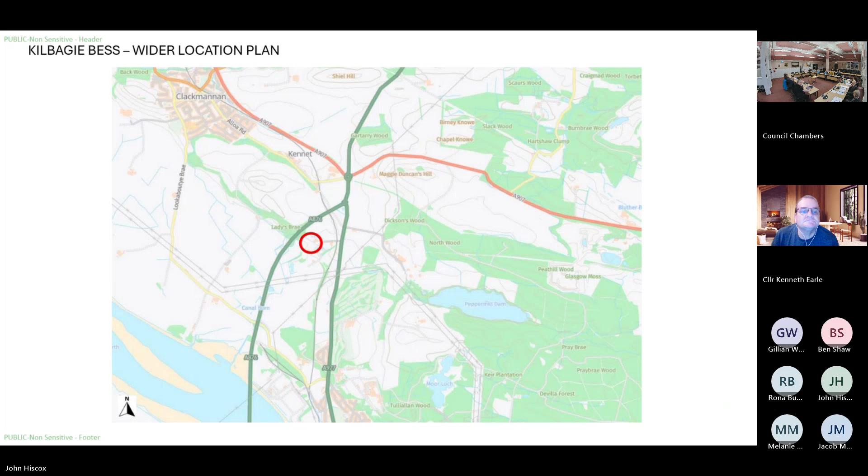Okay, so it will start to make more sense here. Site A is the primary area for development where you would see the battery energy storage systems and the substation going, and Site B over to the east there is not really being developed other than for environmental enhancement.

I think it's useful to see this slide with regard to the boundary of the county there with Fife, and hopefully you can see that quite clearly. Look at the areas that are within fully within Clackmannanshire.

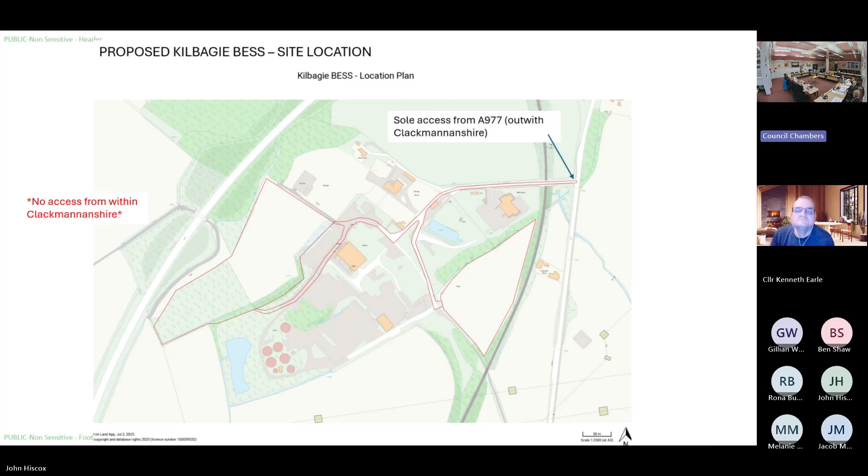I think I might have skipped - sorry, it jumped ahead. Just gone back a slide just to show you here the position of the sole access coming from Fife, not in Clackmannanshire. There's no direct access proposed for the A876.

Okay, it's caught up with itself. This is the first really informative plan we've got to look at. The main elements there, I'll try to talk you through them.

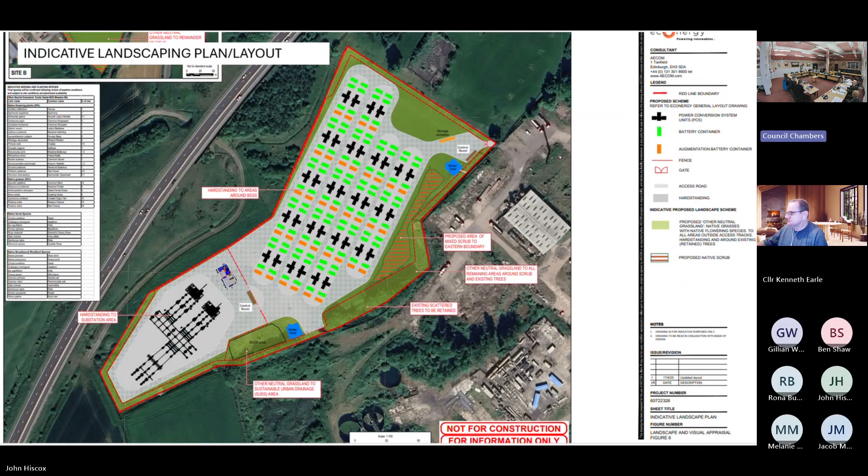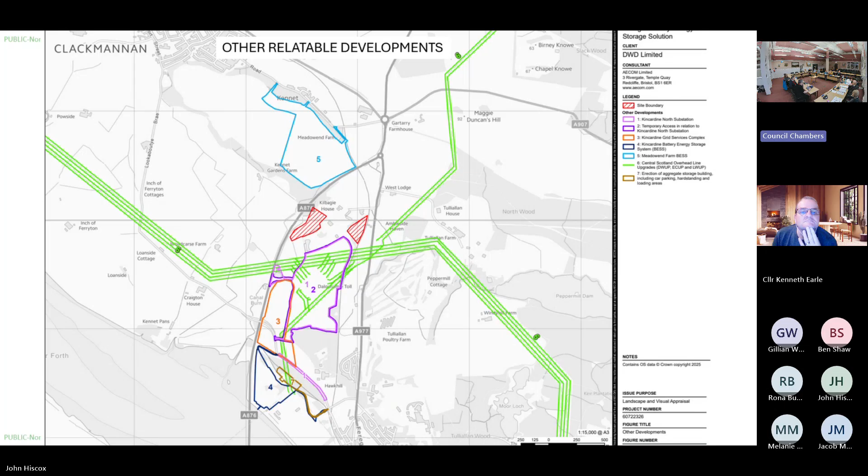A couple of years ago, we were approached with an idea for another BESS system scheme in that area. It's been through pre-application with the Energy Consents Unit, but for the past year it's been quiet, nothing's really happened. So if that is pursued at some stage, it will have its own issues, but it will be cumulative with the scheme you're looking at today, because the distance between the two is less than half a kilometre, maybe just a couple of hundred metres.

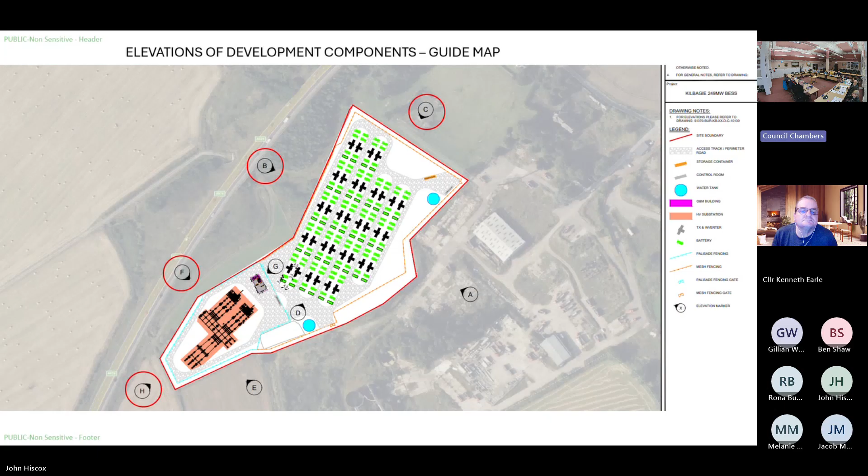So just to explain this slide, you can see the circles there with letters H, F, B and C in them, and next are some elevation drawings. It's not that easy to interpret because of the nature of the scheme, but I'll try to take you through these so you can understand a bit better what you'll be looking at. Essentially, H, F and B on the left-hand side are the sort of journey along the A876, whereas C at the top, which I've put in for additional information, is looking from private ground to the northeast of the site.

The levels across the site at the moment vary, it's not a flat site. It rises slightly from the southwest to the northeast, but there's also quite a large area of spoil, put in historically due to industrial processes nearby. That would come down, but generally the land would come up to create as flat a surface as possible. So there will be a bit of land raising, somewhere in the region of 2 to 3 metres, not a large scale, not up to the highest ground.

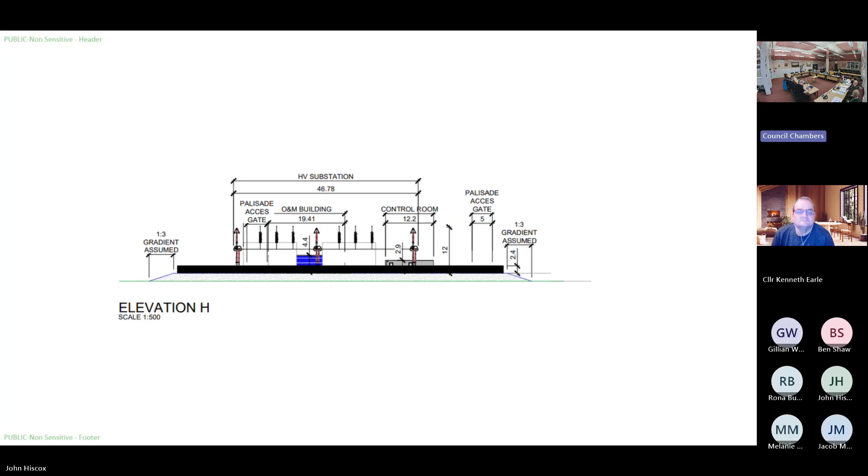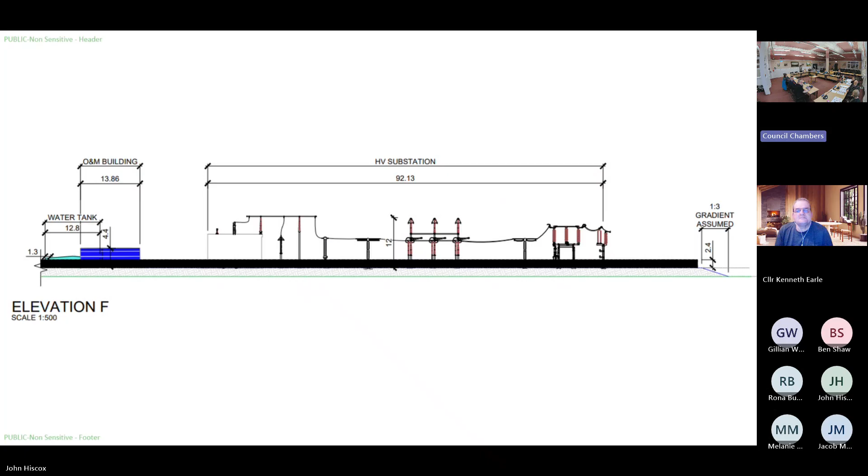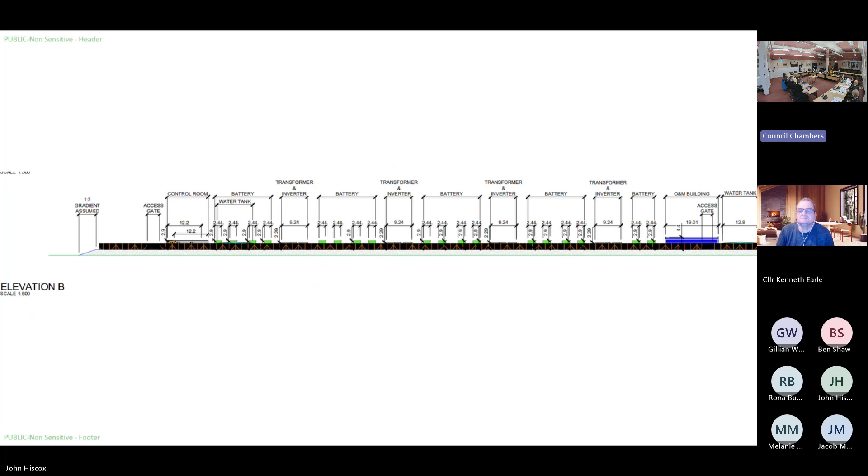The highest area is the substation area you would see first, but of course a substation, and it's important to note this when we're looking further in the presentation, it's not a block. It is see through, if you like. Some of the visualizations you'll see imply there is a sort of block area you'd be looking at, but of course it's not that in reality. I'll explain that when we come to those slides.

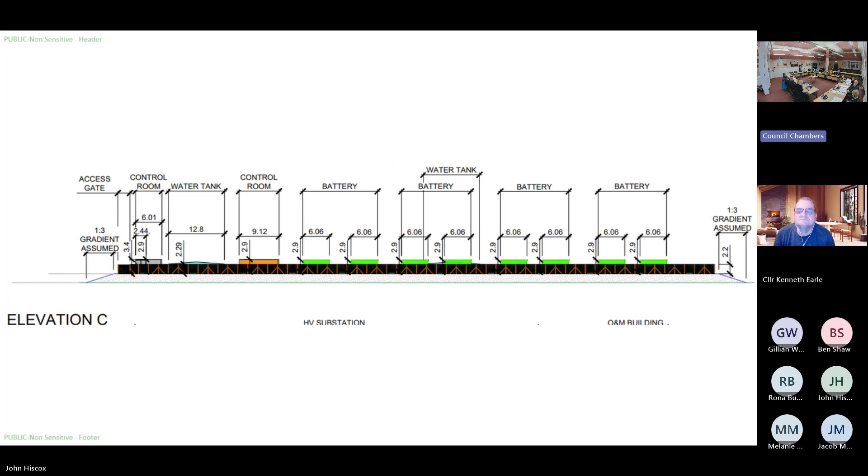And this is the last one. This would be looking southwest from that private ground I showed you, just to get an idea of the complete picture of what the thing's going to look like if it's consented. Moving on, we do have some information with regard to landscape and visual impact assessment.

And if you can just pick out in the middle of this, perhaps I could zoom that in. Would that be acceptable? Was somebody able to zoom that in for me temporarily? If not, then I was thinking more the Gillian and co. Ah, fantastic! You are a master.

So 1, 2, and 3 are in Fife. Whilst they have some relevance with regard to the overall visual impact of the scheme, I'm not including them today because really the ones we're most interested in are the ones which are going to affect Clackmannanshire, bearing in mind this is one of the main routes into the county. So 5 and 4 I will be showing you. For 6, unfortunately there isn't a decent graphic with the application to show you the potential impact. I tried finding that, but there isn't one.

I've also included 2 in the presentation. It is within Fife, but just so you can see what that area looks like - this is site B, where you'll see that the vegetation behind that site blocks off site A completely. So from the A977 in Fife, you're not seeing the development anyway. It's all screened by woodland.

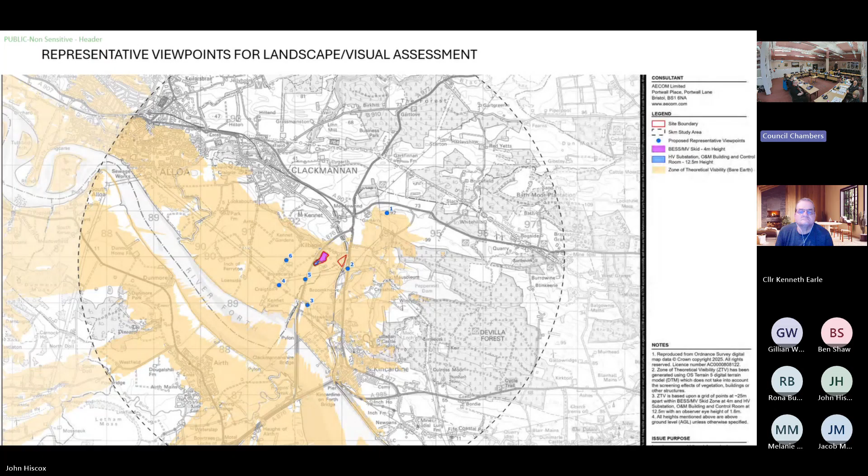Okay, would you mind zooming that out again, please? Thank you. Just back to full. Marvellous. Can you do it all the way, please? It should bounce back a little bit. Perfect. Thank you.

So this is viewpoint 4, and it is on an unclassified road, but it's more of a lane and not heavily used. But it's just to give an idea of how this scheme relates to the infrastructure already in the locality. You can see clearly there the overhead lines and pylons and so on, and also the backcloth of the landform behind and the trees.

And what I was saying earlier about the views of the substation being permeable - in this representation, the red area looks like it's a block, but it's not. That would be the upstands and the gantry, so it is very much more a permeable element of the development. The lower area, the blue, represents the level at which the BESS container units would be.

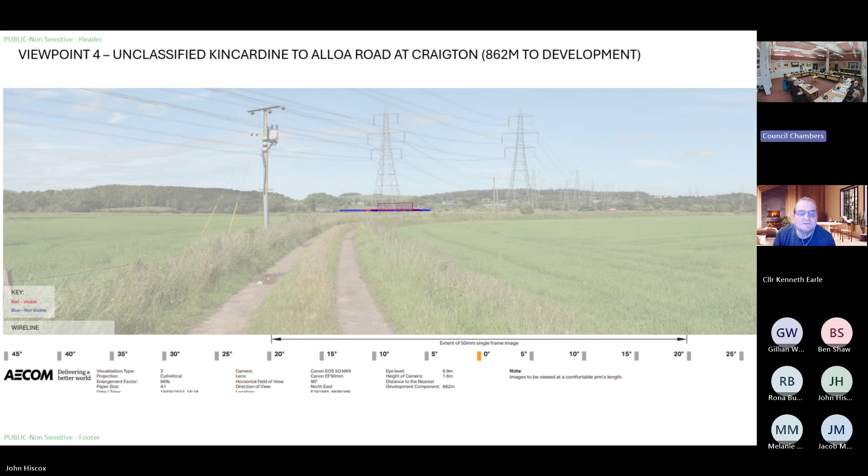So really, this is very much a secondary viewpoint, not frequented heavily by traffic. And although it's helpful, it's not as fully relevant as, for example, this one.

So one of the key considerations for us is the visual impact with regard to receptors being people using that main route into Clackmannanshire. This is about as near as you can get to it safely, which is why they've chosen it as one of the viewpoints. You can see that notwithstanding any vegetation that might be present, the area where the transformer would go comes into view quite quickly as you're coming up the A876. However, you can't fail to notice that you are already in the lee of the pylons and the overhead lines, so we're already looking at something of an industrial landscape characterized by industry.

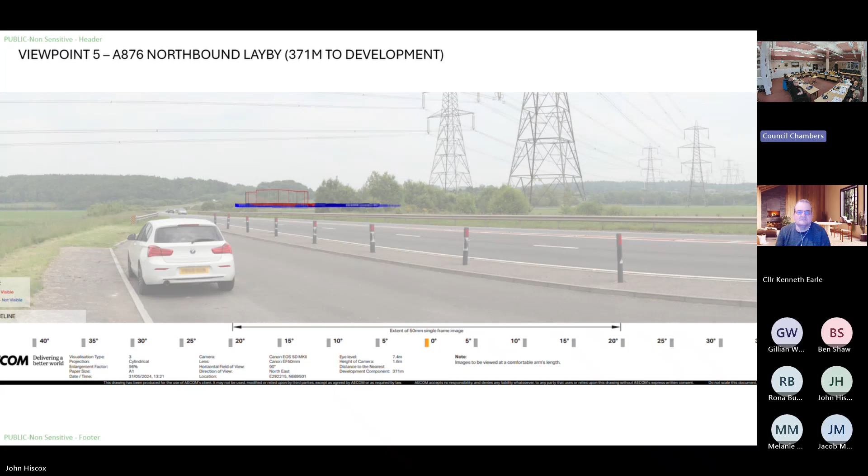So the red block there, that's not the BESS - that's the transformer area. 12.5 meters high, but permeable. But if you've seen any transformer areas in an electrical substation or any other relatable development, they have quite a significant visual impact just because of their industrial nature. So they don't disappear into the landscape, they are quite prominent. I think that's one of the things to remember about this scheme - as you're passing by, you will see this quite prominently.

This is from the A977 in Fife, and that blue area just indicates to you that you're not going to see it from that road. It's all contained behind vegetation, and that vegetation is not going to go away at any point in the near future.

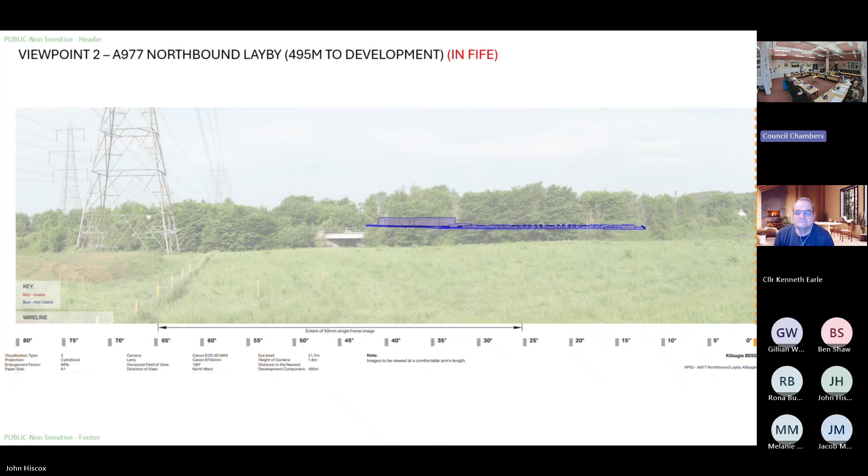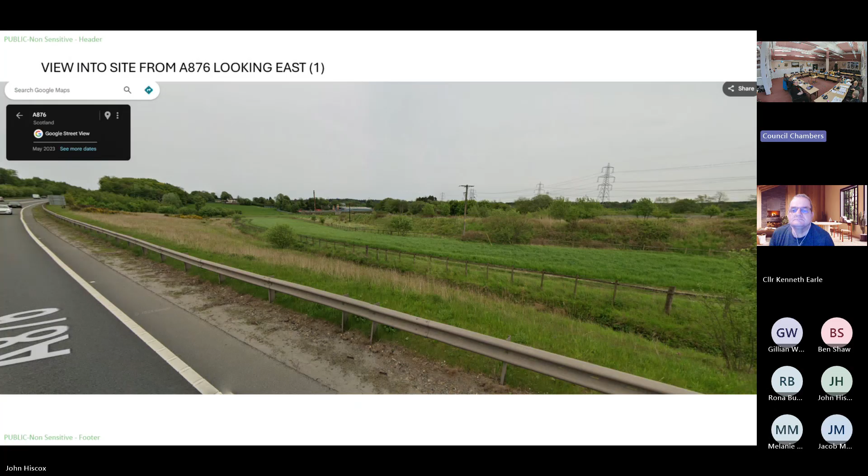I've borrowed some imagery, thank you very much Mr. Google, and this is just really to give you an idea of what I'm talking about in terms of how the development would look in passing on the A876. So really here you're looking east into the site, and you can see just on the right-hand side of the picture the area of spoil I'm talking about - that's where earth has been deposited before, and that will be cleared to arrange for the platform area to be created.

And then I'm just going to talk you through the other components. This is the water tank - there's two of them identified in the drawings there. You can see the height, 2.29 meters to the eave, so between 2.5 and 3 meters to the upper, or I can call it the middle point of the water tanks.

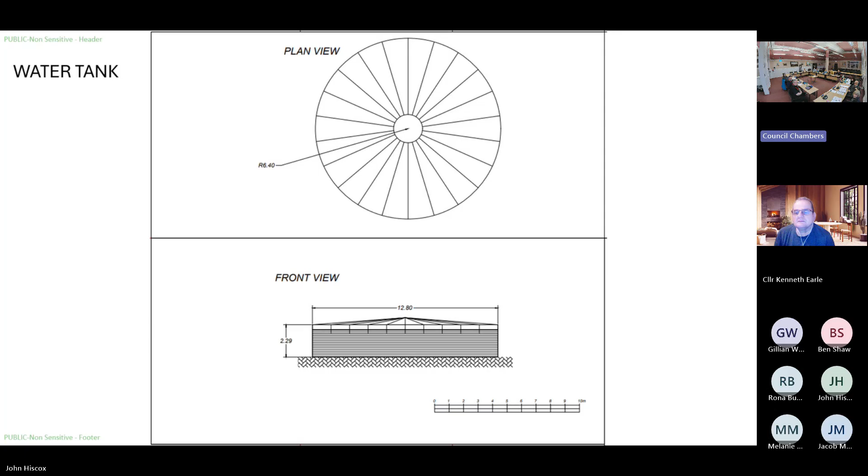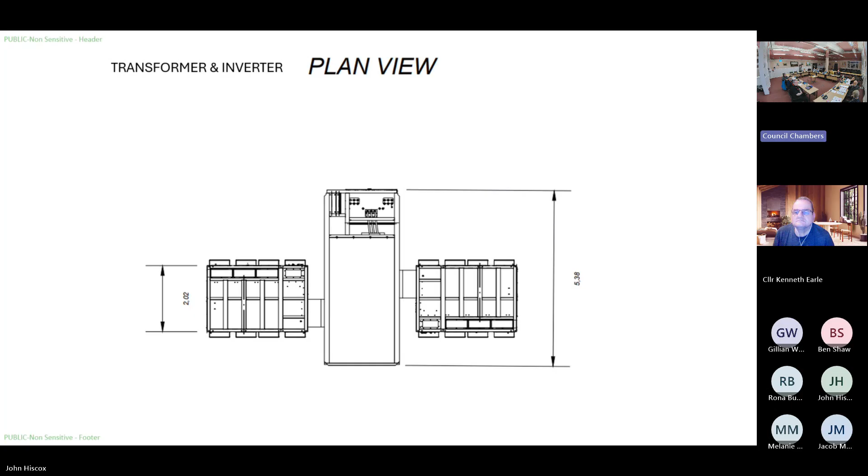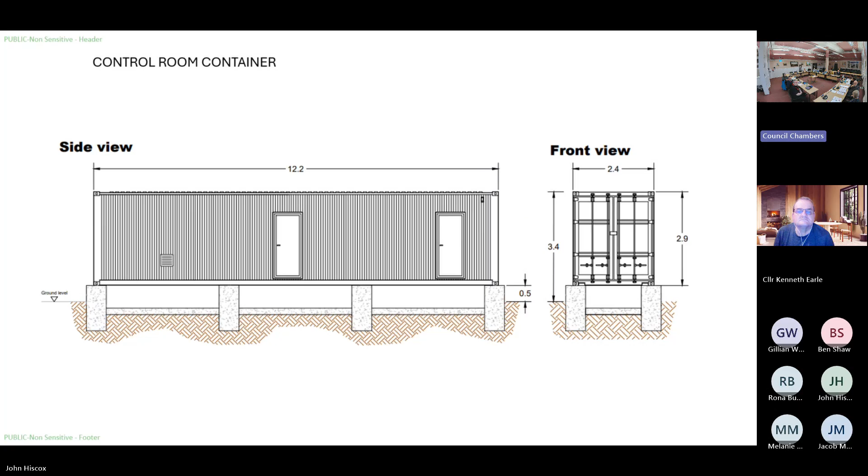Control room container - nothing fancy about that. It's just in effect a shipping container, just adapted so that you can have control on site.

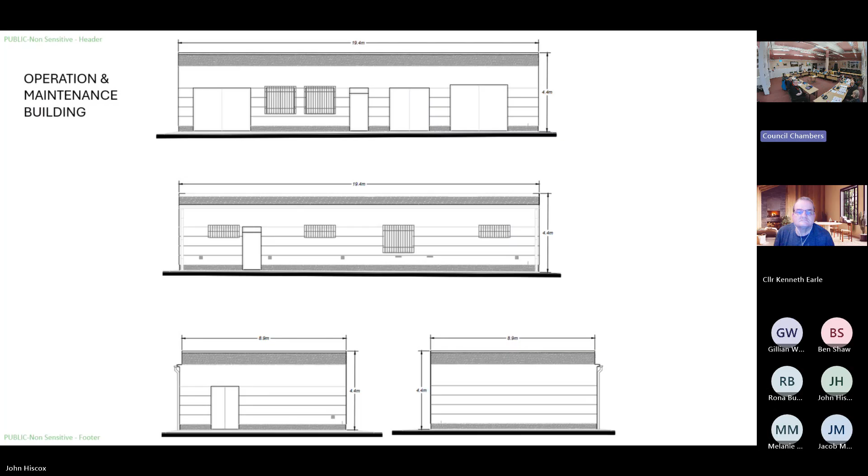And then probably the largest building on site, which is a 19-meter, I think, by 7-meter maintenance and operation building - I think it says 8.9.

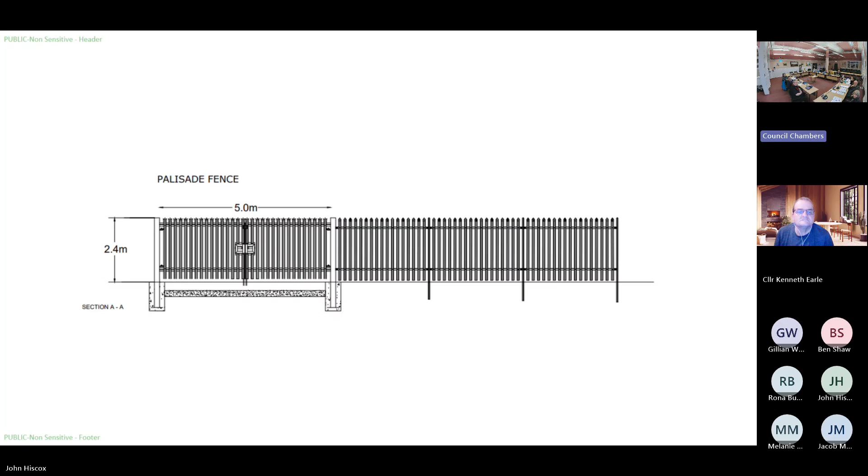Inevitably, a site like this has palisade fencing, which is the security fencing around the bits which are unsafe to enter. And then you have the mesh fence which goes around the outside of the site - so the whole thing isn't surrounded by palisade. These are the fences you would see as you're looking around the edge of the site, and they're up to 2.2 meters in height.

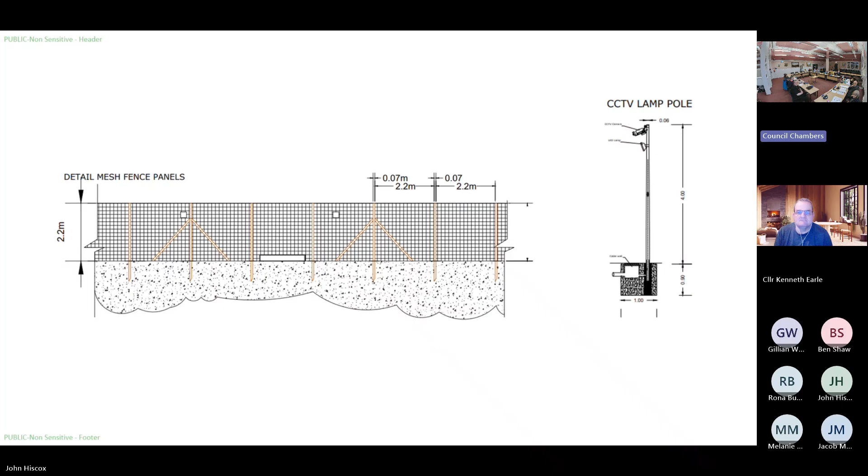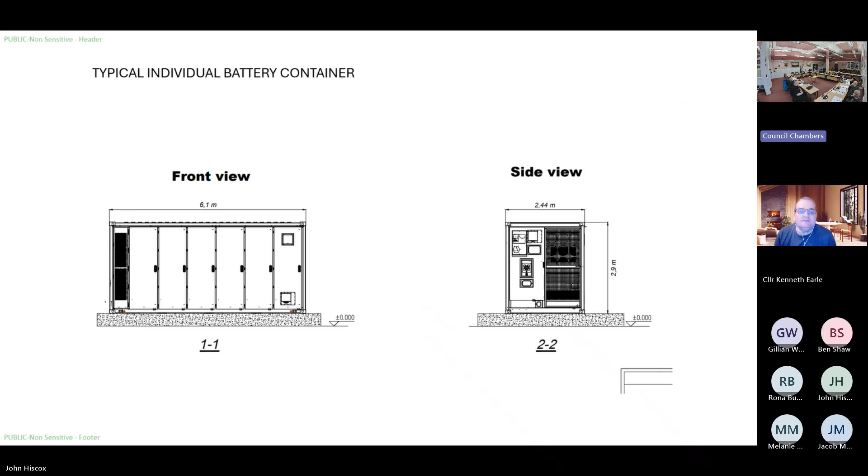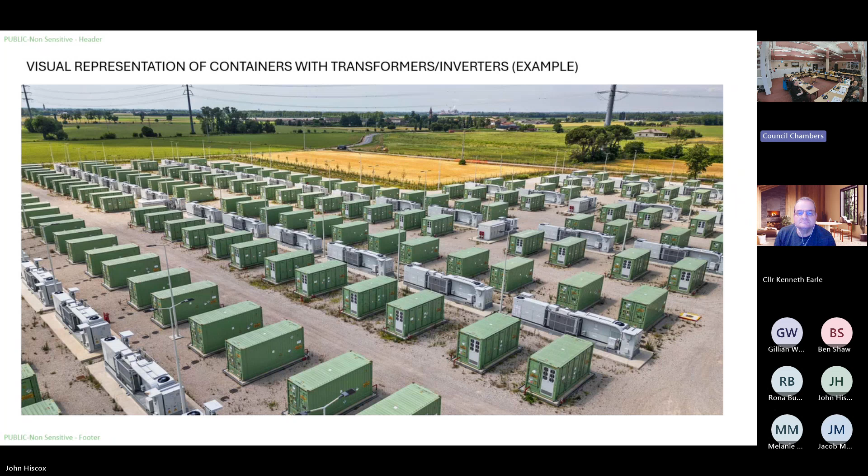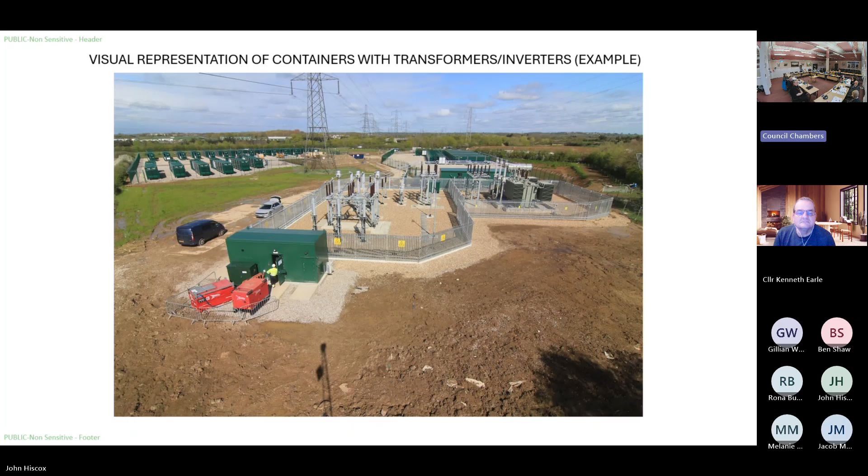And another one. Good to be able to compare the options which are potentially there in terms of the colouring. And the final one. This is just to give you an idea of what the transformers I was talking about look like. I'm sure you've seen them on the larger electrical substations, but to complete the picture, this is the sort of ancillary equipment that goes with the BESS itself.

So to summarise on that, before I go into— let me think, should I do this first? I thought it might be useful to just read out to you the principles of BESS. This is in the report, but I'll read it for the benefit of the room.

A BESS is an electrochemical device that charges or collects energy from renewables like solar and wind, from the grid or a power plant, and then releases that energy at a later time when it is needed. The batteries charge at off-peak times and then supply electricity to the local electricity distribution network at times of peak energy demand. BESS therefore have a key role to play in contributing towards achieving net zero targets and providing flexibility within the energy system. The batteries are contained within cabin structures similar in appearance to shipping containers.

So we are recommending that there's no objection to this scheme. The proposals as submitted, bearing in mind that at some stage we are going to see a finalised scheme if it's consented. I'd like to point out to you that in this case, the recommendation isn't finely balanced.

This principle is well supported by national planning policy, and the site is generally suitable, having regard to, firstly, previous development in the locality, but also allocations and the fact that this is vacant and derelict land, as set out, or much of site A, in the 2015 study.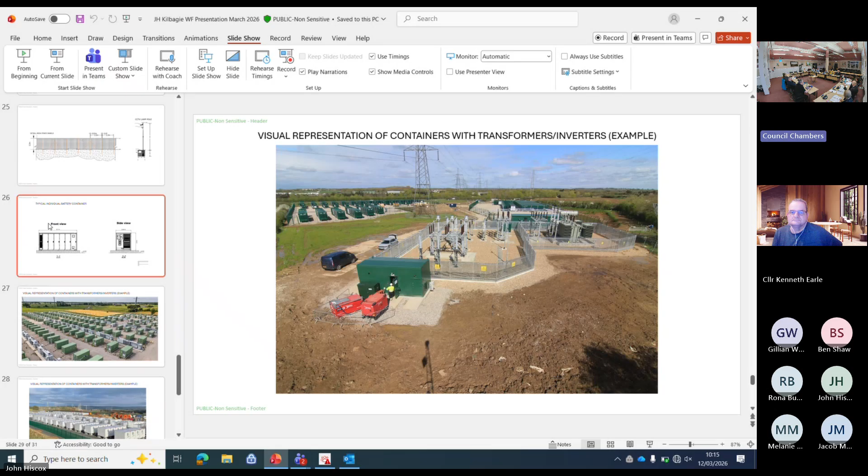Sitting in what we saw was quite a natural environment there. And that's the big change to that. So if those square lines, straight lines and square edges were able to be mitigated visually by tree planting as an alternative to colouring these things, not to a non-standard shade, which might be very, very expensive and meet with very strenuous objection. But I don't know, can we talk about tree coverage on the border of the 876?

John, do you want to stick into that? Really quick, John, there is a separate landscaping condition, yes. Chair, again, condition 20 on page 47, that does cover the screening, my landscape separate to the colour. So officers have picked up on that.

I mean, I take very much the councillor's point about, yes, I think it is the desire of the committee that we want to clarify, we want it to look better than the landscape, so perhaps wording around that and leaving the colour maybe a bit more fluid. And then ultimately, the committee can only express a desire, can't actually dictate it. But I think if you feel strongly about it, I think you should do that. And I'm getting the impression that you do.

So we could put an amendment in regards to what Lee had said, that in conjunction with the chair of the planning committee, it comes back to you. Obviously you've understood our expression and you've got the same expression, so I would be happy if it went that way, if it was an amendment in that regard.

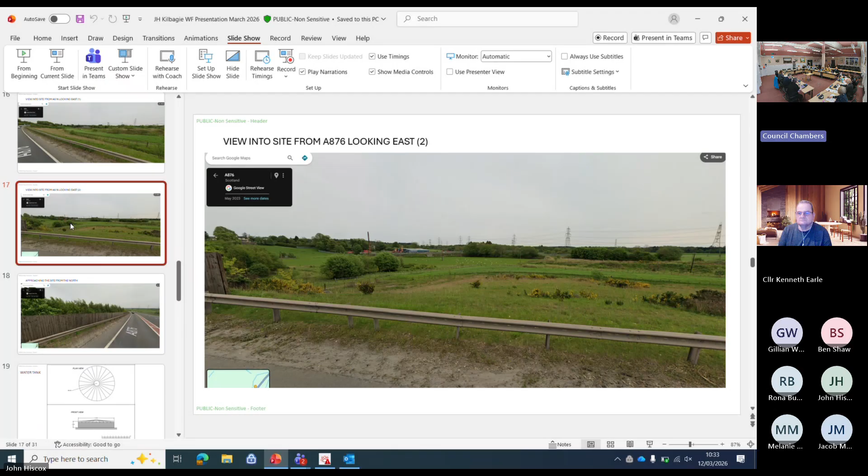I don't know if you want to adjourn for 5 minutes because there might be another suggested condition coming forward. So, from what I gather, the committee members were talking about the landscaping. Maybe if we listen to what's happening and then adjourn for 5 minutes to get that written up. So who's writing this up? You and another legal team. Okay folks, we'll adjourn until 20.

I think it would be easier if we dealt with all the questions first, just in case anything further requires to be amended, rather than adjourning, going back, and adjourning again. So if we can continue with questions and then we can adjourn. That makes sense - prepare the amendments and then put it forward. Right, thank you, okay. Let's park the appearance for the moment. Any further questions?

Councillor Balsillie: Thank you. So this is new technology, and all of us are dealing with this as the authority determines these issues. So we've had a good debate. My question is whether the authority can address the following issues, and the implication is, if not, we should maybe request that the following aspects are covered by the determining authority.

So we've had a discussion on camouflage, and I prefer to use that phrase rather than colour, camouflage in the landscape is mitigated. So does the authority have any standard conditions on that? It doesn't, from what was said. So is there a standard condition on site fire electrical protection?

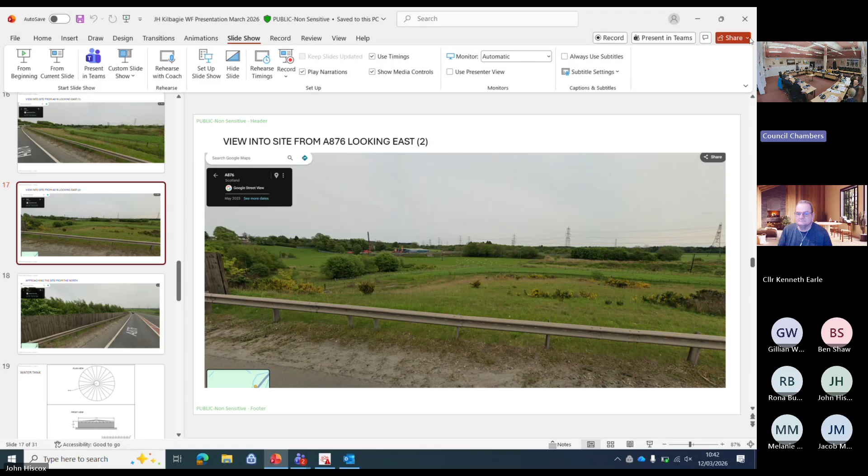But I wonder if maybe the new condition specifically talks about colour. You're right up to a point, Councillor Balsillie - we can't definitely say we want this colour because it's not in our gift. However, the committee can say it has a preference for a colour, but wants the colour to be explored, with the final decision delegated to the Chief Planning Officer in consultation with the Chair. So I wondered if it might be better, and I think we should adjourn, to keep condition 20 as is - the landscaping condition - because I think it's very comprehensive, unless members tell me they don't think it is.

And then maybe put a new condition 21 alongside that on the colour, and then archaeology becomes 22 and biodiversity becomes 23. So we'd put in an additional condition, because I think colour and landscaping both cover the visual impacts of the scheme on Clackmannanshire. So they sit alongside each other, but we just need a little bit of time to get the wording on screening, visual impact, colour - whatever that may be - refined so everybody's happy with the wording. Is that right? Are members happy with that?

Yeah, I think that's fair enough. Councillor McTaggart, then Councillor Bennett.

Thanks, Chair. I would just maybe want to strengthen condition 20 a bit, especially visual impact along the 876, because that seems to be - we spoke about 45 seconds and 30 seconds - but I'm not thinking so much about that. I'm thinking about visitors coming into the county, and that being the first thing they see as they enter on the 876. If that was the first thing I saw coming into a strange place, I don't think I'd be very happy. But if that was softened in some way - as Chair pointed out earlier, if it wasn't these square box shapes, if it was softened by some visually pleasing elements, taking away the colour question for the moment - just something that softens and blends into the landscape rather than sticking out like a sore thumb.